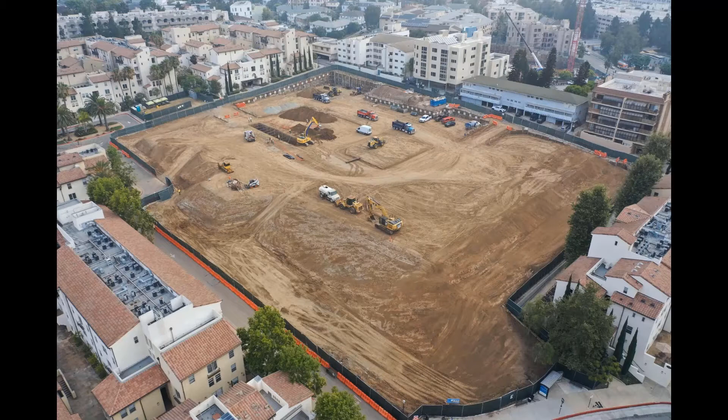The activities that we start with on a new ground-up structure are what we call earthwork and shoring. In these first clips, you will see the earthwork and grading activities. You can see large equipment, including front-end loaders and excavators. The equipment is used to move dirt around, excavate, and compact the existing soils to the elevations that

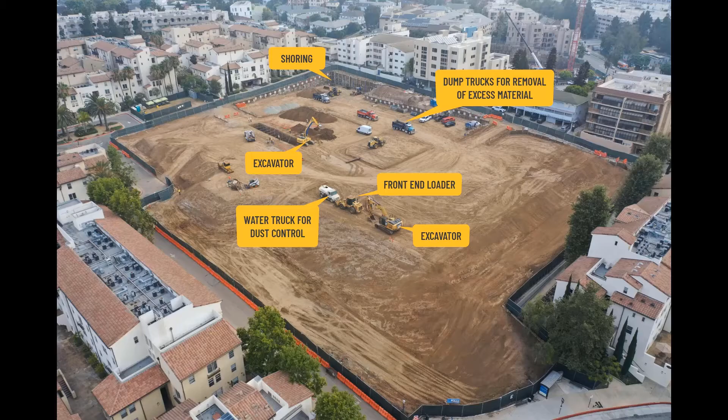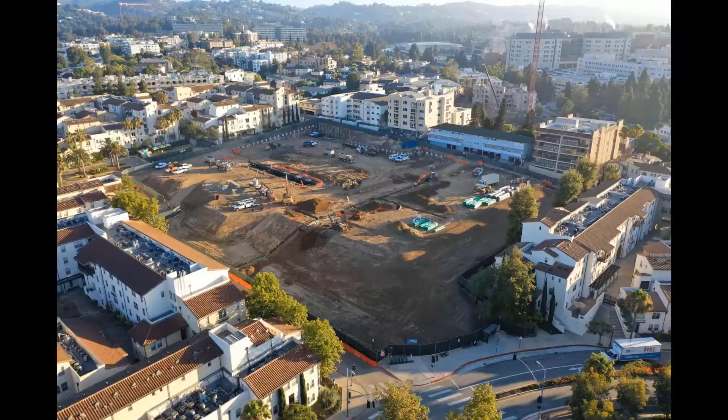the drawings call for prior to beginning the building foundations. Once we have the site to the elevations needed, we begin installing deep utilities. Here you can see green pipe laying on the ground that is for future sewer and storm drain lines. The deep utilities are put in early, prior to foundations being started.

Here you will see what looks like a darker gray flat surface that is put through the middle of the site. This is crushed rock material that we place to make it easier to move large equipment through the site without digging up dirt. This also helps keep the site clean and less muddy when it rains.

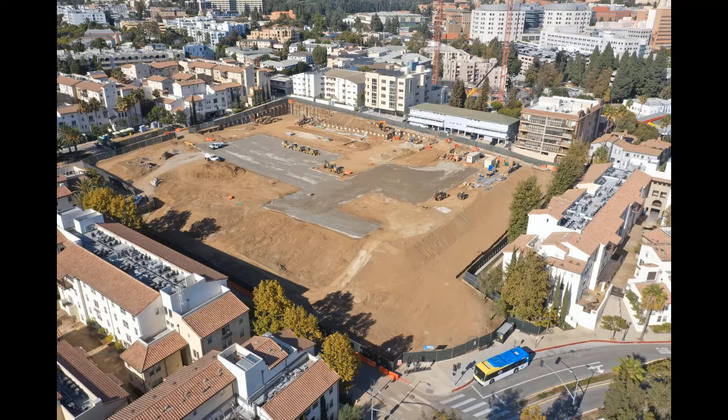In these next phases, you will start to see more material being stored around the site as we begin to enter into the structure phase of the project. Here we are beginning foundations, followed by concrete walls and concrete columns, or what we call vertical work.

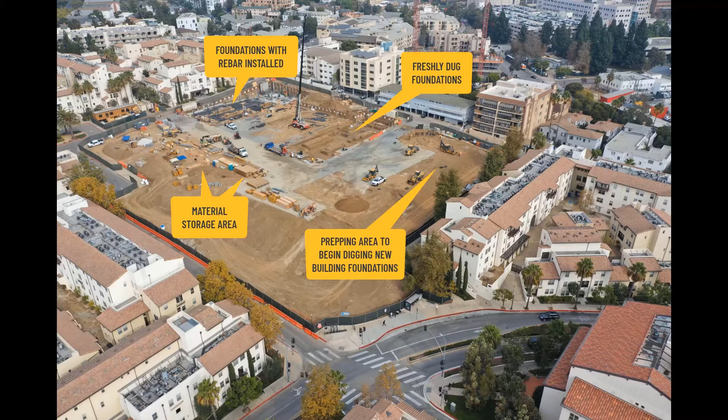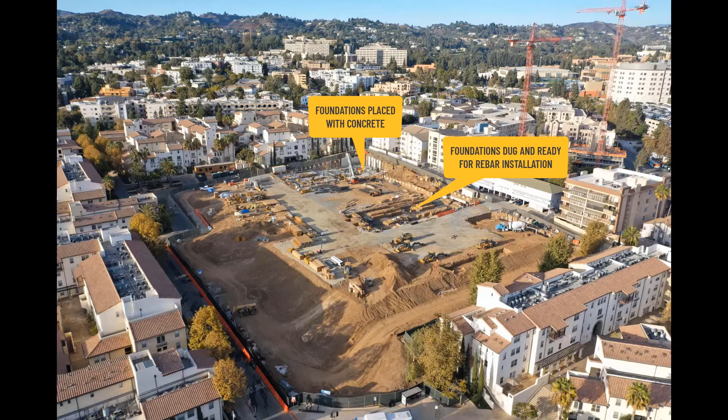Foundations are dug with a backhoe, reinforcing steel is placed inside, and then are filled with concrete. These foundations are what support the weight of the buildings we are building above, and thus distributed down through the walls and columns. Digging foundations with a backhoe requires a high level of skill and detail that can be seen in the middle of the project site.

You'll start to see more crane activity on site now, first with mobile cranes that are able to move around the project site. These cranes are used to place rebar and to set concrete formwork. Formwork is what makes the shape of our walls and columns, and is what the concrete is placed inside of.

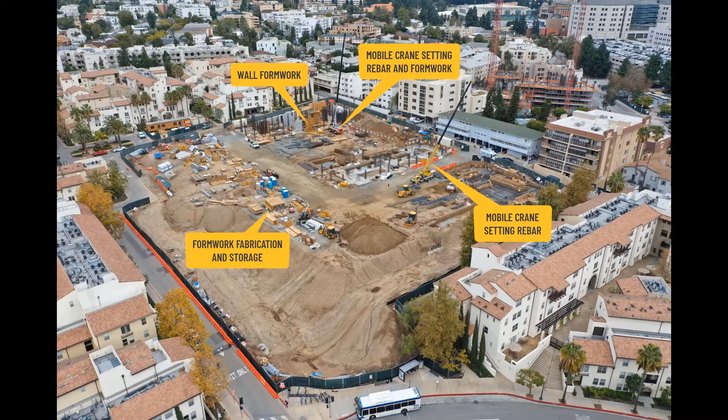Once the concrete cures or dries, the formwork can be removed and reused in most cases. This is what we call cycling our formwork.

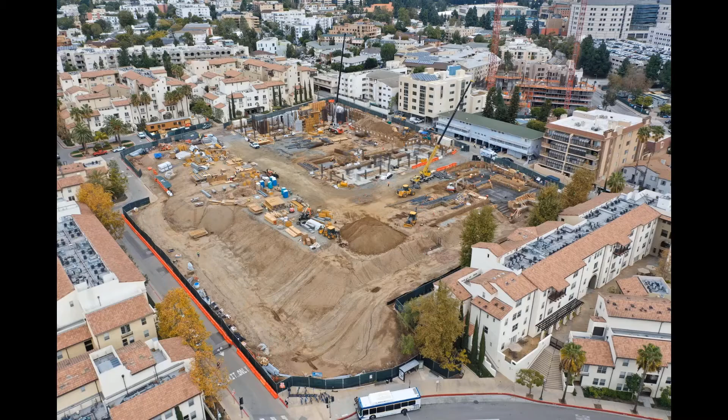As the project progresses and installs foundations, we begin to get ready for our tower cranes. The project installed multiple tower cranes that each have to be thoughtfully planned out to location, the reachable radius, and the capacity needed that they can lift.

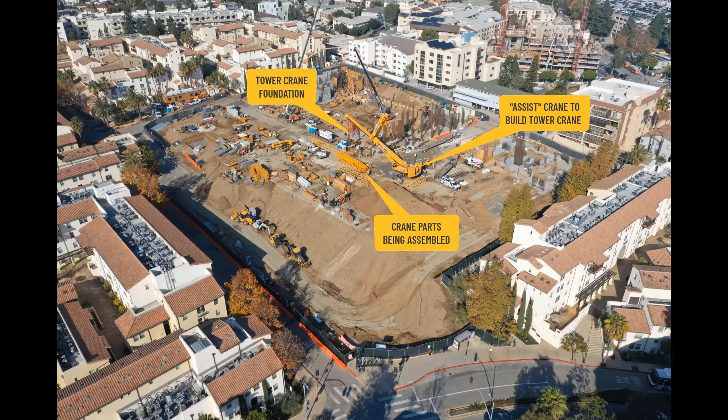Each crane requires a foundation to be set and its own crane to be built with. This is what the large yellow crane you see in the middle of the site is.

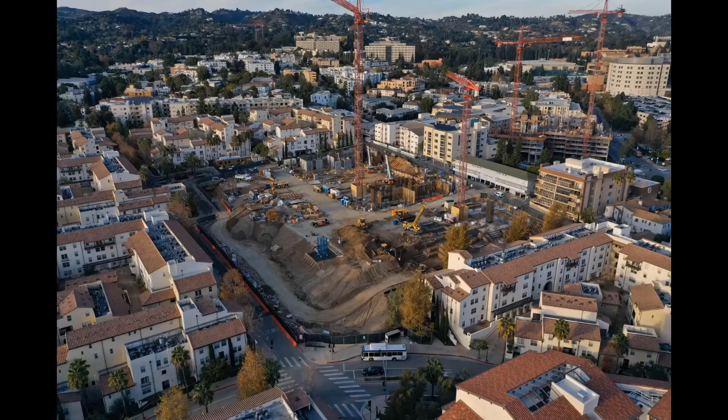The foundation stage is often one of the more difficult parts of the project for many reasons. First, space starts to become much more limited. It is the beginning of the project, and crews are just getting to know each other and to work with

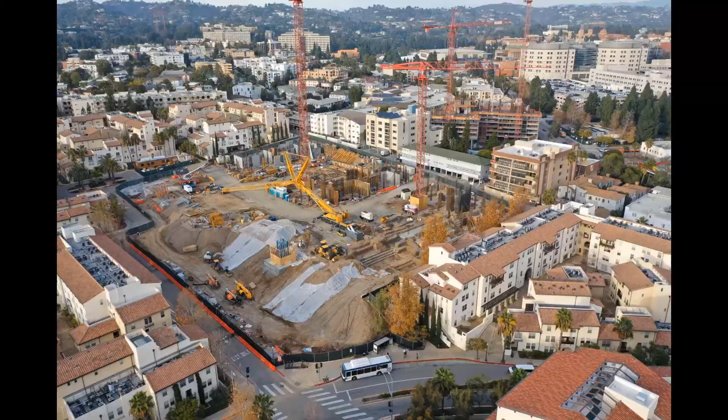each other. Work is often different throughout and requires a good understanding of details and drawings. Foundation work requires moving and hauling around a lot of dirt, which requires a high level of planning for where it will go so that it's not in the way of other parts of the project.

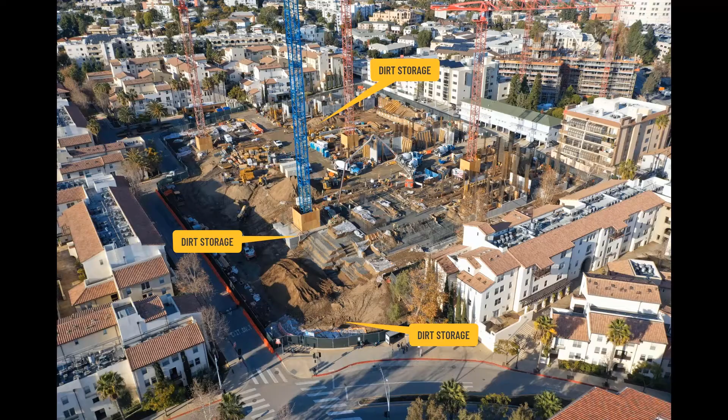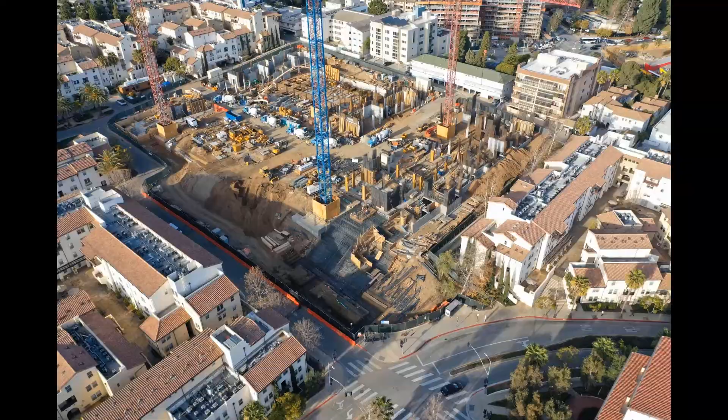If work is done in the winter, rain can have a large impact due to water and mud. If work is happening in a colder climate, you're also dealing with harsh winter conditions, including snow.

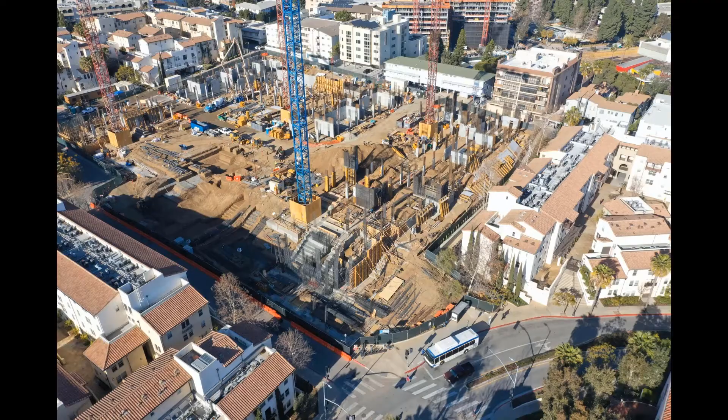As more cranes are installed, the project has the ability to move things around more quickly, and more walls and columns begin to take shape. The project then begins to move into the elevated deck stage. You will see in these sequences, each building begins to get taller and taller.

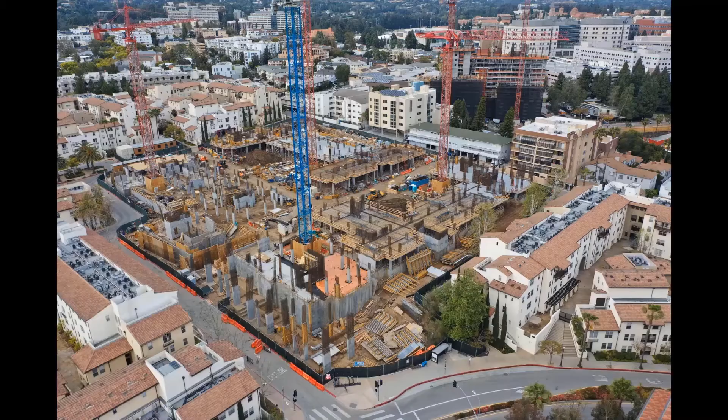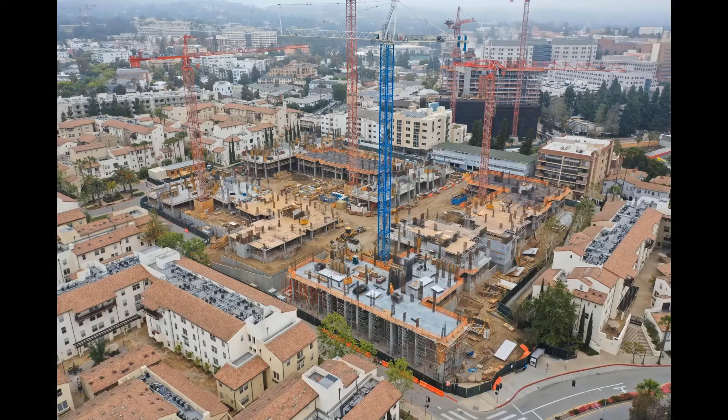The decks are built with vertical shoring posts that support plywood. Rebar is placed on top of the plywood to reinforce the concrete. Once all rebar is placed, we then place concrete on top of the plywood and shoring. This is what creates the concrete deck.

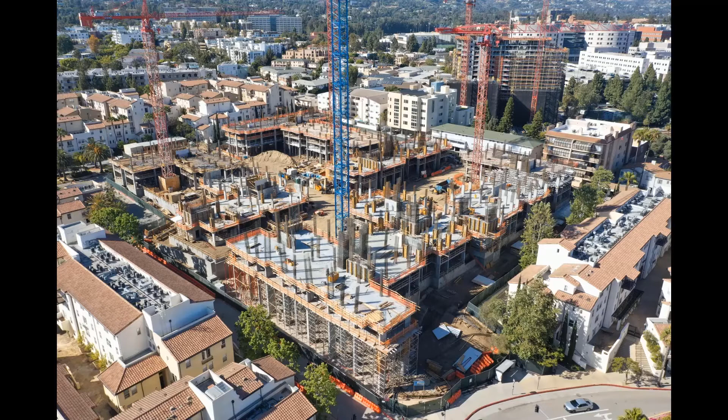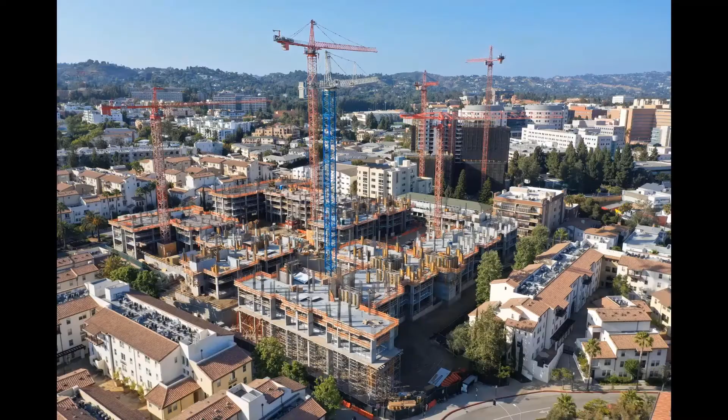Each deck is required to cure or set for 14 days. Then the plywood and shoring can be removed and cycled above to make the next deck. It took the project about 1 year to get from the foundation stage to the roof, which was 10 floors.

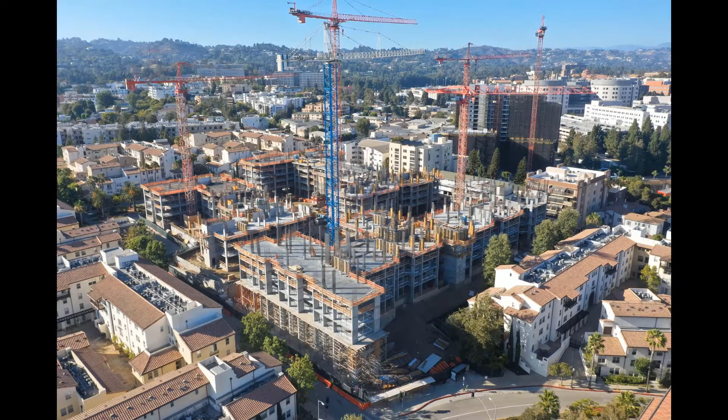As the buildings come close to topping out with concrete, you can see some other work start to take place. Scaffold begins to go up around the exteriors to begin installing the exterior systems that will eventually be a plaster finish.

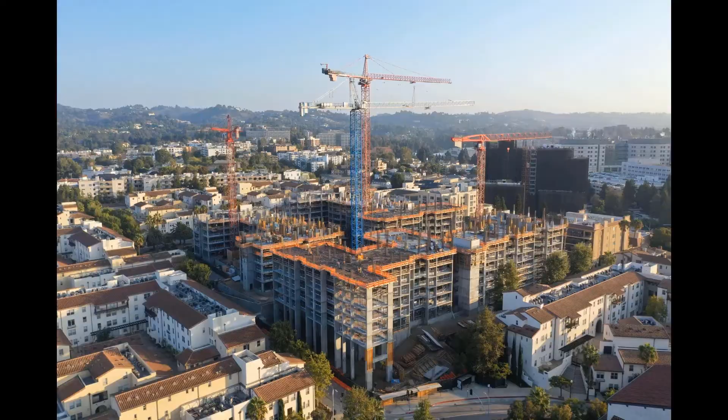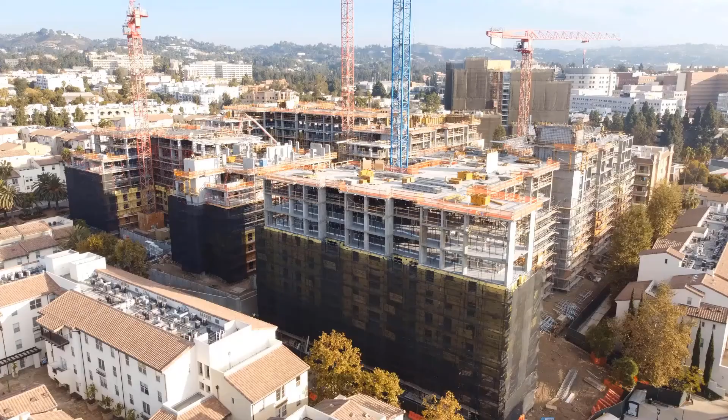On the inside of the buildings, something you can't necessarily see here, we have interior framing, electrical, plumbing, and mechanical systems beginning to take shape. Today, we are just about 50% complete and are transitioning to getting the building's roofs in place and the exteriors completed to a stage of what we call being dried in. We will be complete with construction in September of 2022.

Thanks, Mark. As Mark mentioned previously, at UCLA Southwest the primary scope of work for the last year and a half has been cast in place concrete. These structures are from the ground up about 10 stories tall each, and the material that builds them up is concrete. Just as with the questions about bringing trucks and deliveries into the job site, our concrete comes in trucks too, and all the material that goes into these pours comes on trucks. Coordinating all this material onto the job site prior to the pour, and then scheduling the trucks for the pour, is everything that goes into a successful concrete pour. This video gives you a day in the life of what it's like to live on the Southwest Campus Apartments job site.

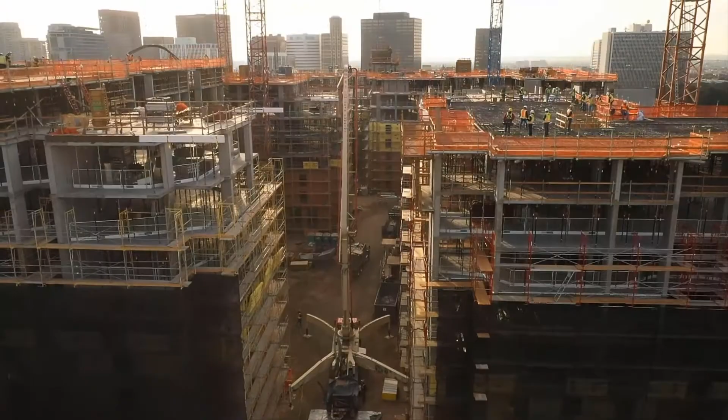Let's jump on site to a day in the life of a concrete deck pour at UCLA Southwest. Job sites are clearly pretty busy places, so there's a lot of different things that need to be coordinated in order to make a concrete pour successful. All the people you see here will help plan the things we're just about to talk about.

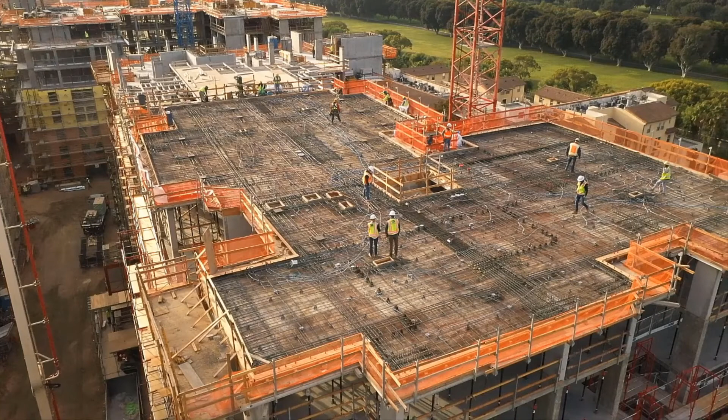Multiple team members are involved in any successful concrete pour. On this job, prior to placing any concrete, PCL management uses checklists developed in-house to verify that all the steps have been taken to ensure a safe and accurate pour takes place. Everything you see below gets installed and reviewed by PCL management, but it is continuously inspected and eventually signed off by a certified inspector from the university.

Just like baking a cake, there are a lot of different ingredients that go into a concrete pour. We're not just one big building full of gray stuff - there are a lot of different parts and pieces to this building, what we may call the life of the building. Let's point out a few items. In the concrete pour we have reinforcing steel, shortened to rebar, on the job site. This is what you could think of as the bones of any concrete slab, sidewalk, or wall - anything you might see in a concrete building - and it gives the concrete strength and holds it together after the concrete's hardened.

Some other ingredients are the things that give the building life - maybe that's water, maybe that's power - whatever you might think, we have to consider that as we pour this concrete. Some items we'd like to point out are different mechanical or electrical pieces of equipment. You see some squares in the deck - these are what we call blockouts. We'll have different pieces of mechanical equipment or vents running up through these decks so that as the equipment is brought into the building, we can successfully provide air conditioning, heating, and ventilation to the entire structure.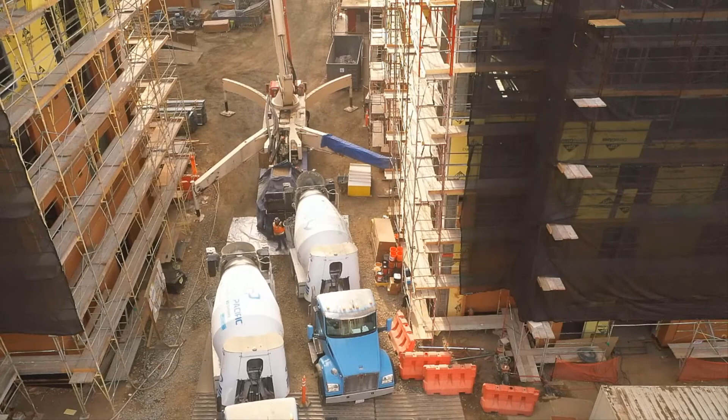Vehicle routes for concrete trucks are coordinated with the job site team to guide the trucks in and out of the job site in a timely manner. In order to keep the workers productive and the pour going well, we have trucks lined up outside the job site to always keep somebody busy.

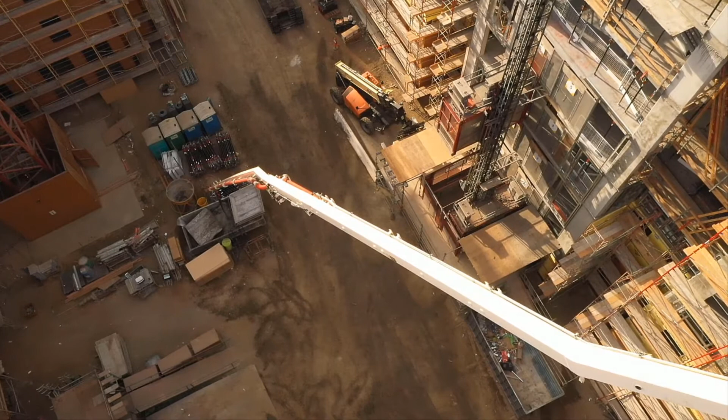That spider-looking structure you might have caught in the last frame is called a concrete pump. This large piece of equipment transports the concrete from the trucks up to the deck. Initially, we clean out the pump, what's commonly called priming the pump on the job site, to ensure all the previous residue is cleaned out before we get the pour going.

Once all the coordination and prep work is complete, the real action happens. The lead concrete laborer will take hold of the concrete pump and maneuver the hose around the pour, guiding the concrete out of the pump to ensure it's placed evenly across the slab. Our friend in the yellow hat is carrying what's called a vibrator. This piece of equipment is dropped in and out of the concrete slab as it's poured, to ensure the concrete cures and bonds correctly.

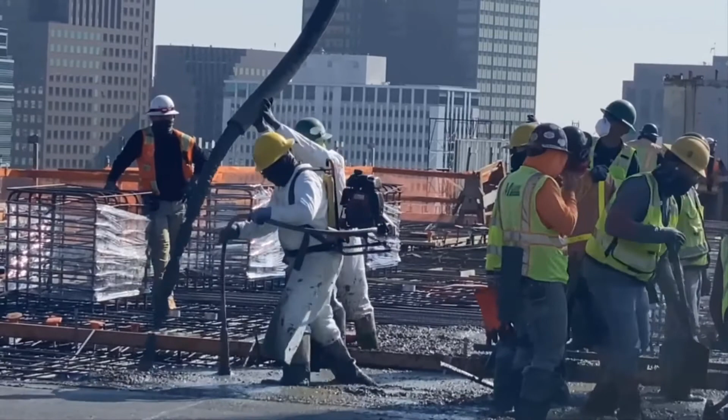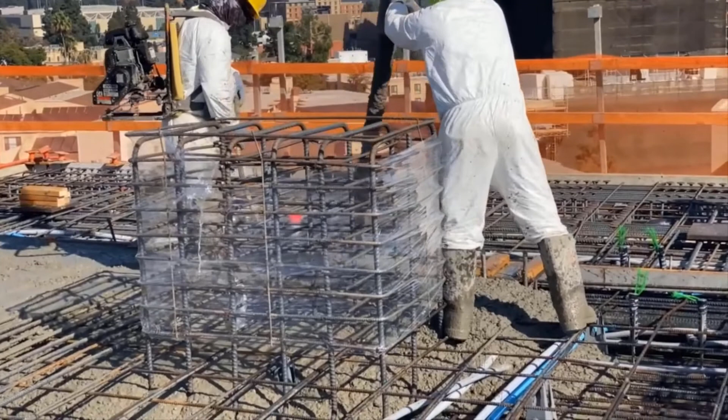There he goes, following right behind the pump man. The guy in the corner is watering the deck, kind of like you'd water your front lawn, but this is a key step in order to have the concrete retain moisture as it's being poured and ensure it doesn't dry quicker than it's being poured in the field.

On this particular day on the job site, the crew poured around 220 yards of concrete in just about 4 hours.

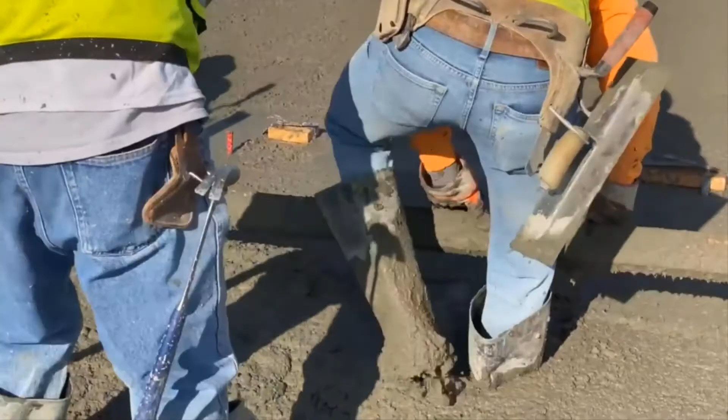Once enough concrete is poured, the finishers come into play. Just as their name implies, the finishers wrap up the pour by smoothing the concrete as it's poured into place. There are a few different tools finishers use, starting with screeds and shovels. Essentially, the finishers are evening out the thickness of the concrete as it's been poured in place, ensuring our friend with the hose didn't pour too much or too little in one specific area on the deck.

It's important to communicate to the finishers how the deck is to be finished, to what thickness, what level of finish. There are a lot of different elements that come into play once the deck is poured, and the whole crew needs to be aware of what's in the slab to ensure everything can be used after the fact.

Eventually, a vibratory screed is used on this slab. You can see the crew member using this piece of equipment on a larger surface area—it helps him more rapidly smooth out the concrete as it's poured. However, keep in mind that once we get to this point, the concrete pour is not over.

Finishers will eventually request to bring in what are called power trowels. These are walking machines with a spinning mechanism on the bottom that essentially finishes the slab in circles, giving it the final finish required by the architect, the engineer, or any designer who wants to see what the building will look like after the fact.

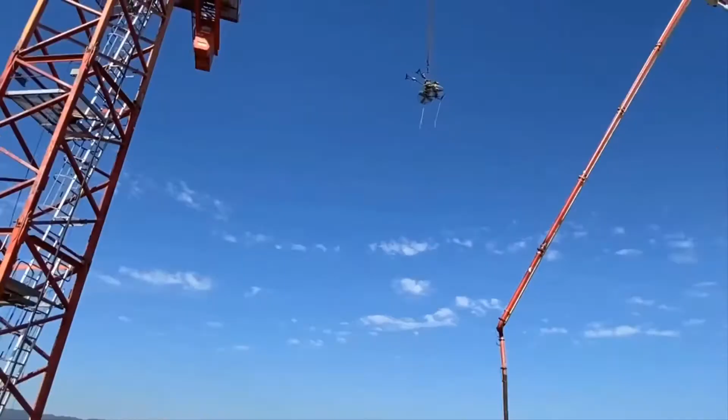As I mentioned, it's important that finishing is to the expectation needed for any future materials to connect to the concrete, or if it's bare concrete, that it looks presentable to the end user. In this case, that would be the management and maintenance staff at UCLA.

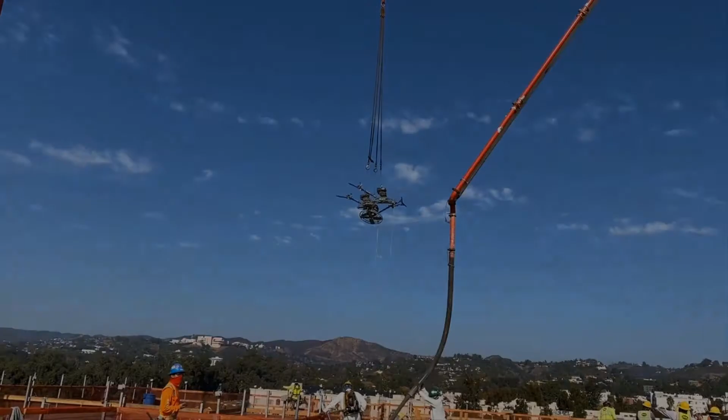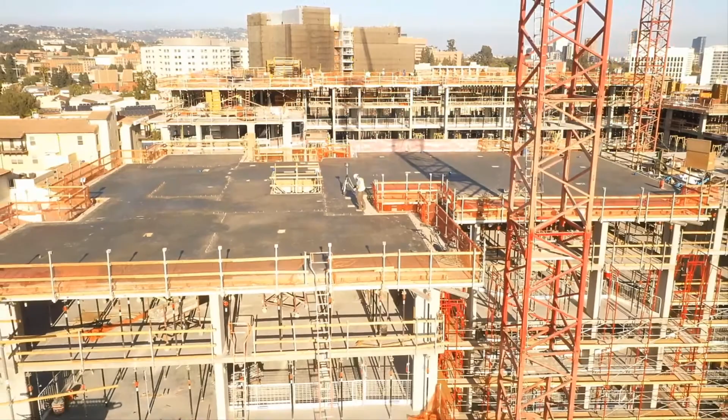At the end of the day, we have a complete concrete deck, but the work isn't done for any PCLer. What we do at this point is utilize new technology called laser scanning to get a full view picture after the deck has been poured. Laser scanning has been a huge resource at UCLA Southwest in particular. It essentially creates photo images for the team to analyze the deck as it's been placed in the field, and see how close it has reached the design intention. The different thicknesses and finish levels can all be reviewed by the team in order to solve problems, just like 3D modeling helps.

For other dismantles, I'll tell you about them real quick. With the assist crane not being high enough, you have to use what we call a tower bracket. They're installed on the side of the tower, and then each piece of the tower is removed as the rest of the tower is being supported by the bracket and lowered piece by piece. It takes a little longer, but it's sometimes your only option when you have no room or it's too high. So again, here you're going to see a top-down dismantle with an assist crane.

On this crane dismantle, we are working on a top-down dismantle. Other dismantles are when you install a bracket on the side of the crane and remove each tower piece individually, which you'll see later in the film.

The day prior is a setup day. We set up, clear the area, tour the site, and ensure the team is safe and ready. The setup of the assist crane can take 1 to 2 days for a hydraulic crane, which you see here in the video, and other types of cranes can take up to a week, like a conventional.

On this day, we also remove some of the accessories of the crane: the cameras, utility power to the crane cab, lights on the boom, jib, or the tower. The removal of the hoist cable is done on the previous day, along with the cable hook.

The first step in removing the tower crane is the counterweights—removal of the counterweights that sit on the counter jib in a vertical position behind the crane. These weights allow the crane to be balanced when lifting large objects. The second step is removal of the boom and the jib. There are 4 to 5 pieces of the boom, and each piece is disconnected one at a time by removing pins and lifting them down to the ground.

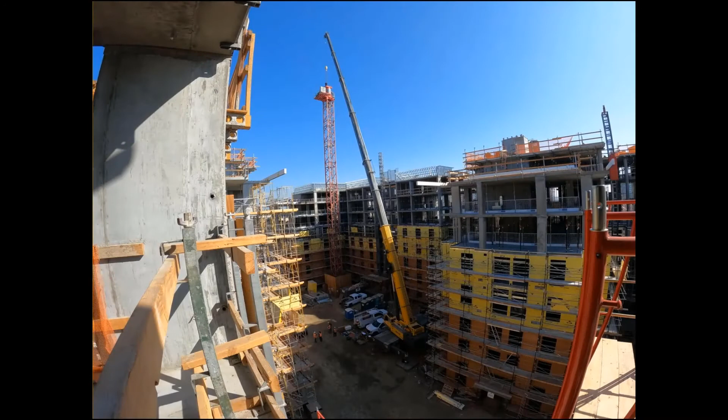Step 4, the cab and the turntable. The removal of the pins holding the cab, then we lift the cab vertically off the turntable. Then removal of the back of the cab motor house and the rear platform that the operator uses to inspect the cable, the rear, and the motors.

Once that is removed, the last piece of the cab assembly, called the turntable, that rotates the crane 360 degrees, is removed from the top of the tower.

Step 5, the tower removal. Each tower piece is removed in a section of 3 towers. So on our crane, we have 3 pieces to remove, which is 9 sections of tower. A zoom boom or Gradall is used on the ground to help set these pieces down safely, one at a time. As they're set on the ground, they are dismantled, loaded on trucks, and removed off-site.

Once all these pieces are removed, the assist crane can then be dismantled. This again takes 1 day for a hydraulic and up to a week for a conventional.

All right, great. Thanks, Christoph. So it looks like we've got some more questions flying in. There's one about Jesus, but I'll let him answer that one when he introduces the next video. Yep. Do you want to take the next one? Sure. So the next question was, how long did it take for you to get to the position you are presently?

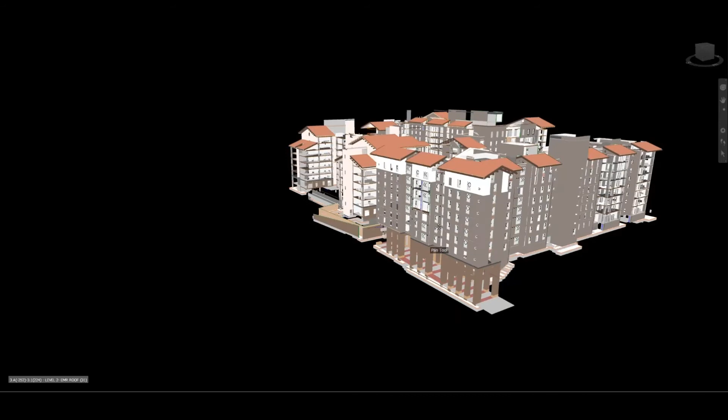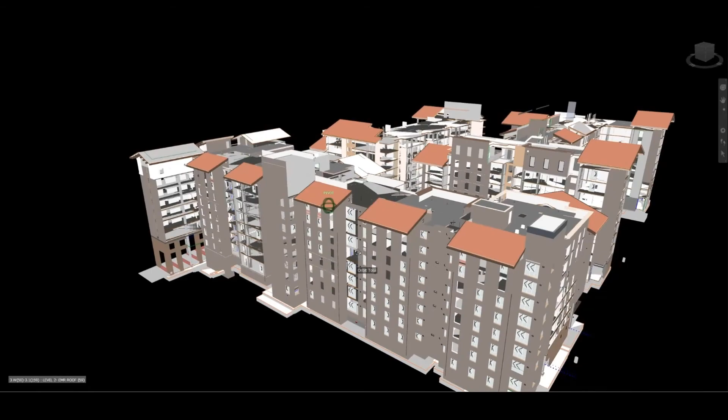The construction industry is traditionally based in a 2D sense - pen to paper, where we look at things in blueprints and then go out into the field to build them. However, the industry has transitioned into a 3D world. We now use computer modeling to build the building on a computer screen, look at all the parts and pieces, and make sure everything fits together before we enter the construction site and build it at real-life scale.

When things get really large in the construction field, it gets difficult to solve problems on the job site on the fly. Computer modeling helps us look at the parts and pieces, analyze if something will become an issue, and solve the problem before it becomes one.

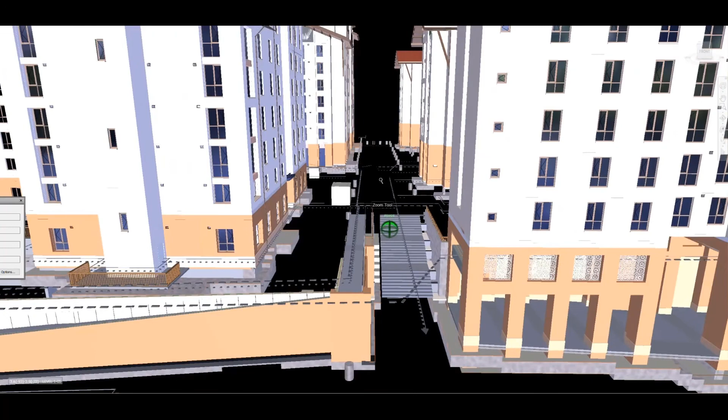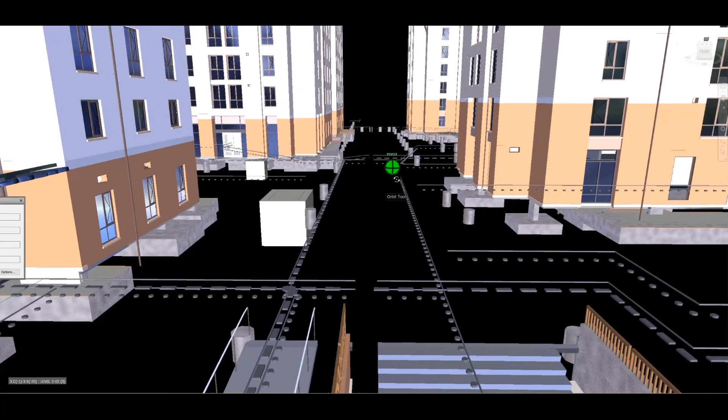Here you can see the foundations. The foundation is the first thing of the project, what starts everything out, and you go up through your structure. Specifically, our project was concrete, so it went all the way to the top of the building, pour by pour, and then came the drywall.

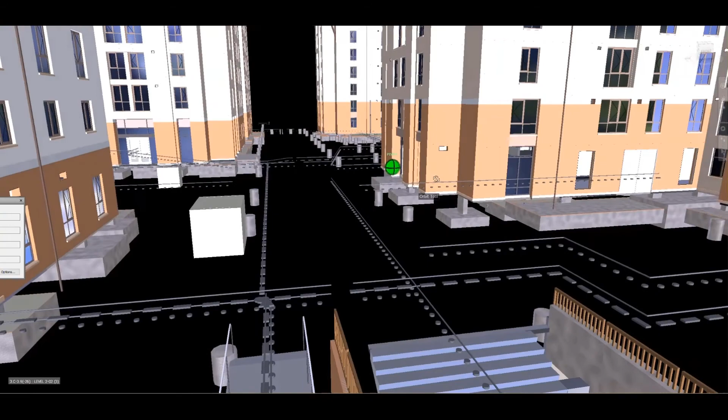At the same time, coming inside the building, you have all your mechanical, your plumbing, and as you close down the walls and everything on the exterior, as you see here, you have your windows and other aspects. So what the model really does is help our field team understand how the project is built, and it's very beneficial in that way.

Here you see a nice little walkway that would lead you straight into the busway, so students can gain access to public transportation very easily, as well as a nice view of this arcade area for one of the buildings.

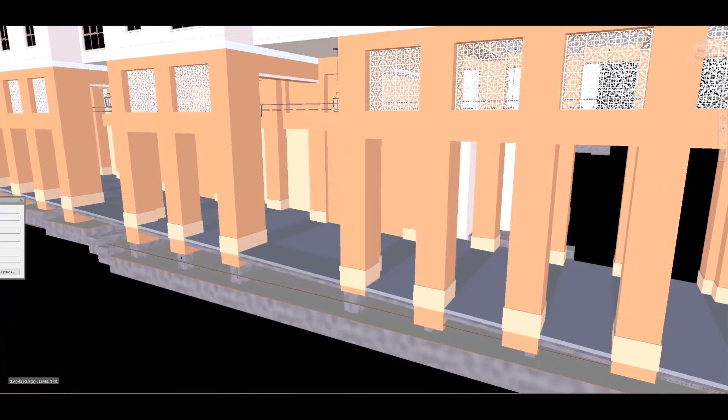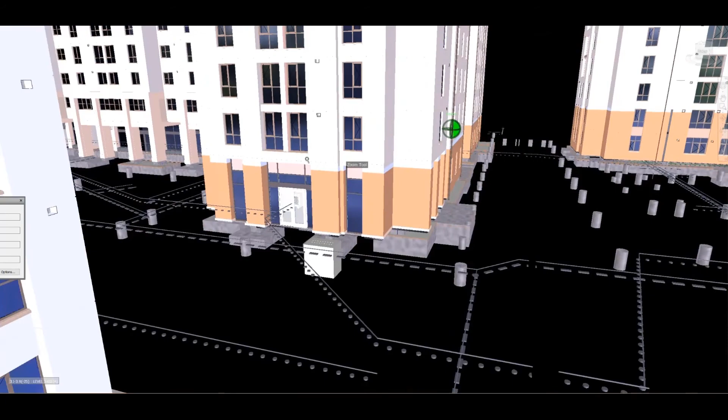Moving back into the site, you really see how the buildings are going to look as you walk through the courtyard area of the project. And then you really see the nice doors and windows as you go into one of the primary buildings of the project.

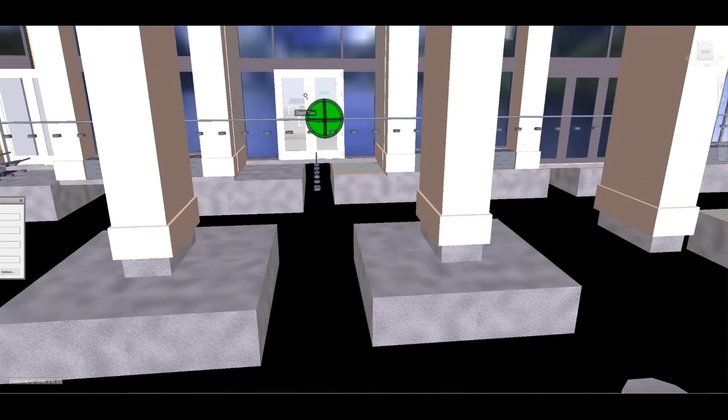So again, the model itself is a tool that we use out in the field so we all know how everything's supposed to be built, and we can put a 3D view into the 2D plans that we worked out of.

Here's a view of the interior side of one of the buildings and how it's going to look. There's a nice little area for the students.

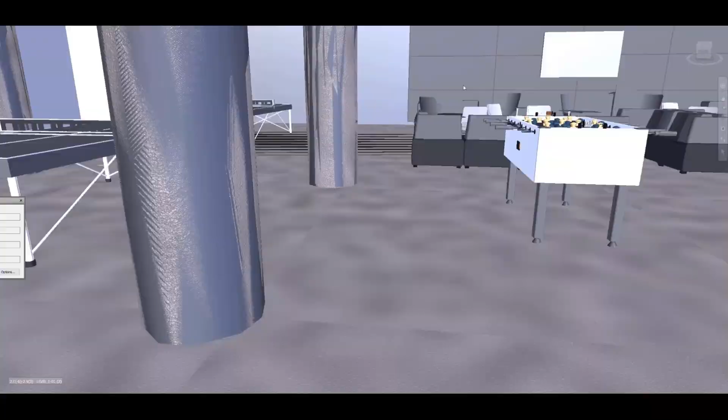So the next part of our technology that we use at PCL and our project specifically is SiteScan. SiteScan is a program software that we use to get real-time information, real-time data from pictures taken from a drone 200, 300 feet above the ground. So what it does is we do a flight, couple of flights. It takes 200, 300 pictures, and then we input it into the software, and the software produces all this data that I'm about to share.

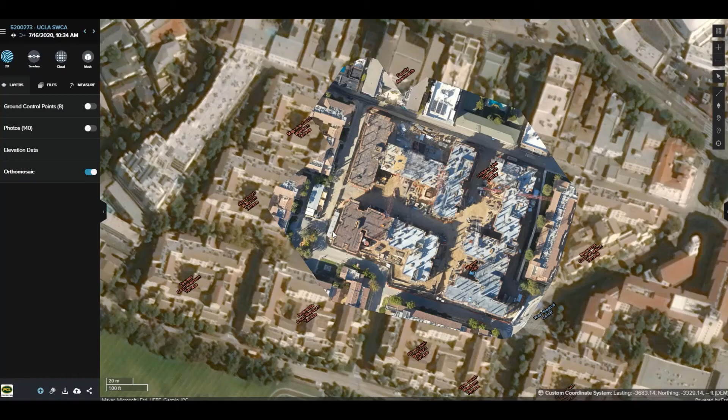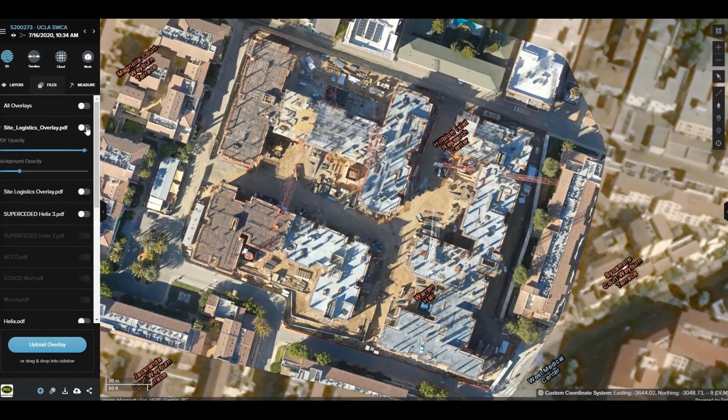One of these good examples of this data that we use is site logistics plans. A site logistics plan is basically a tool that we use on site to plan the work as we go through the weeks, the months, and we follow the schedule. Here you see how all the plan goes into effect.

You have all the buildings identified. You have where the cranes are going to be, as shown in the middle of the site with those crane icons. You have the laydown area. You have the route to enter and exit the site, being gate 1 and gate 2. And then you also have your muster points, which essentially are, if there's an emergency, that's where you're supposed to meet. You have where the fire extinguishers are, so the fire marshal and the emergency department knows where everything's at. So this is one of the most critical tools that we have on site.

And the awesome part about using SiteScan with this is that we can have a live photo of the site, and we overlay the logistics plan on top of it. So it's always changing as the project changes with the construction going on.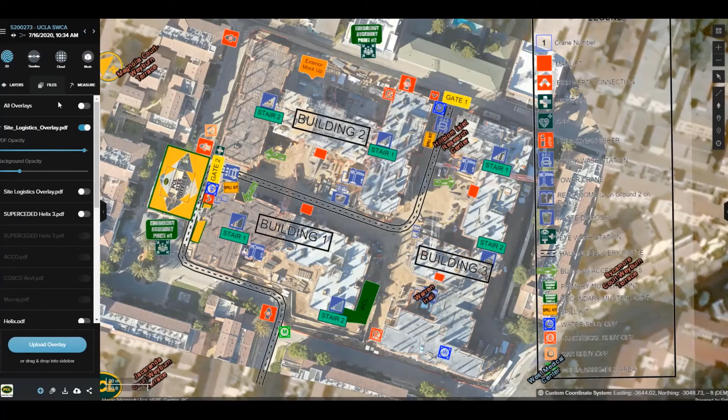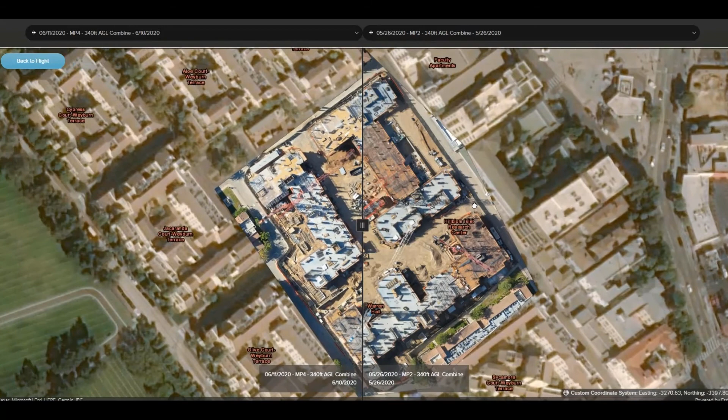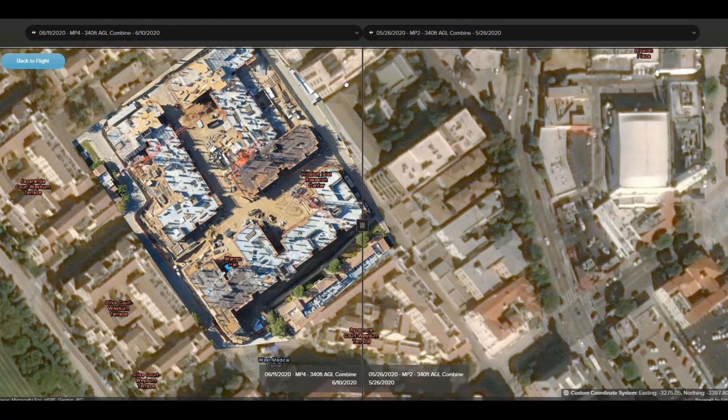Here we have a comparison between 2 different flights, 2 different days. This is a good tool that we use just to see how the project changes from one day to another. As you can see here, these photos are about 2 weeks apart, and there's a lot of change in between them. So it really helps to grasp and understand how fast the project moves.

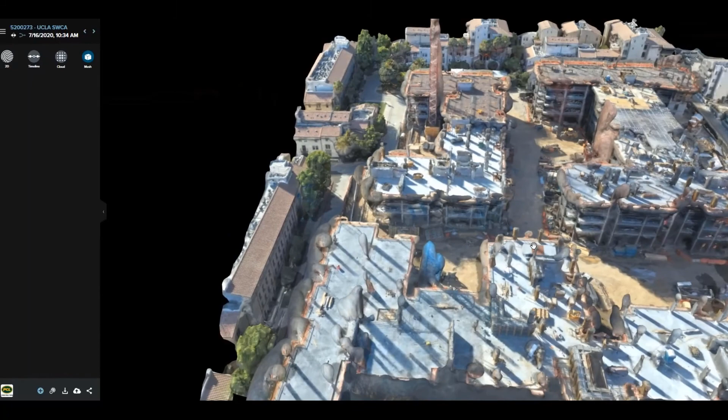The next part of the tools that we can do with SiteScan is just having a 3D model. So this, you can see, is a live or updated mesh 3D model of the site, how it looks after we fly the drone. So this is kind of the data that we can export from it. As the project continues, we can document the project and give a good understanding of the status of the project and share it with the team, the owner, and whoever needs to see the project progress.

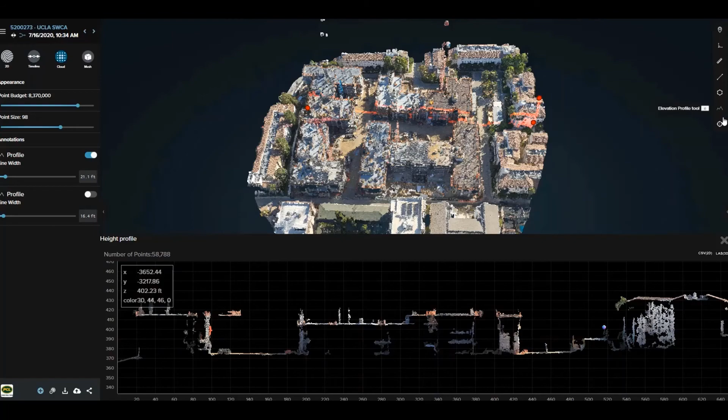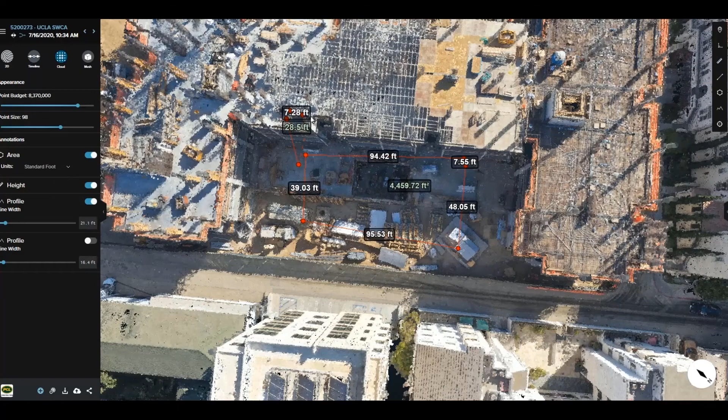The next thing on the list is the 3D mesh, which gives us a lot of live data, a lot of information that we can use for quality control, for checks in the computer that can be done in the field. For example, here you can see how I'm getting a square, which is giving me an area of the whole square that I created on the program. And then you can also get elevations, you can get distances, you can get point load, anything that you really need to do any quality checks.

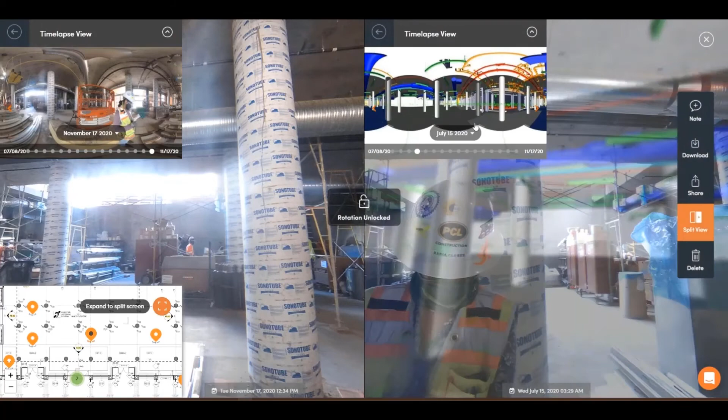The next technology we're excited to share is a program called StructionSite. StructionSite is a software that we use where we document a lot of the day-to-day photographs, which are getting updated 3 times a week by our field team.

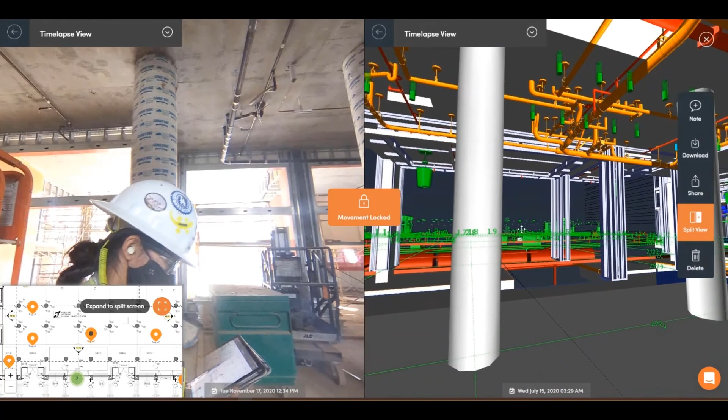As you can see here on the left, you have the actual as-built condition, or the way it looks in the field, versus what the model or what was planned. So as you can see, it's pretty accurate and pretty on point, the work in place versus what was planned.

Moving forward in the construction site, you can see here a plan view of the project. These are all predetermined locations where our team decided progress photos were going to be beneficial for the project.

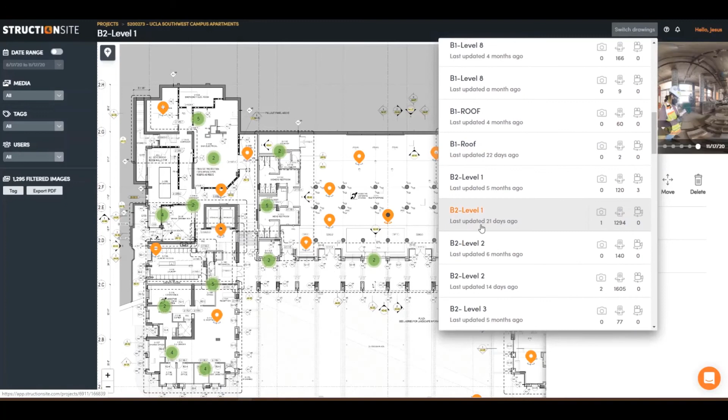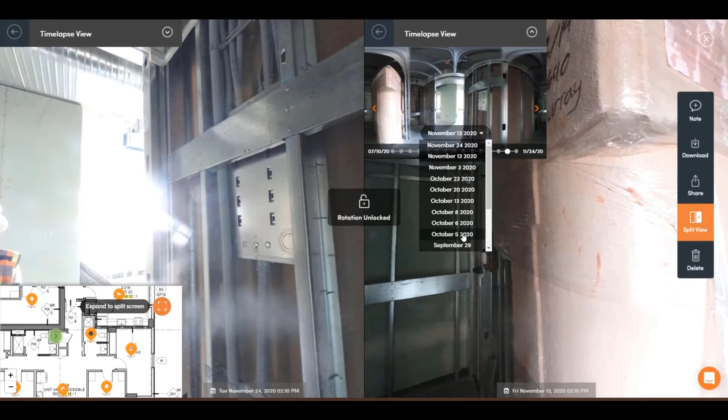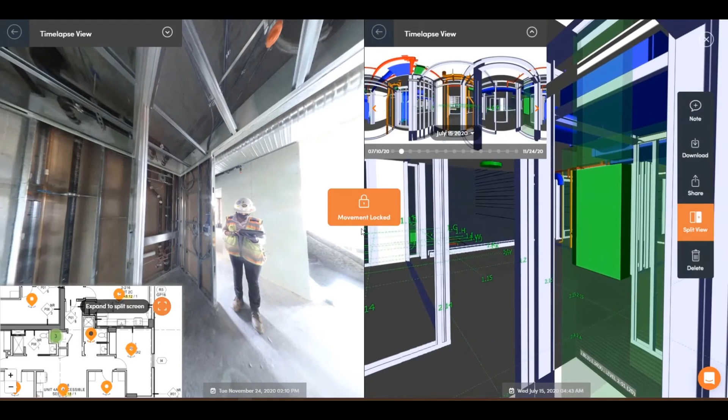I'm going to move into another level here and show you how we use it for closing down walls. So a wall is a metal stud that's sandwiched by two pieces of drywall. Once we close those walls down, it's very hard to know what's inside unless we tear down that wall. With StructionSite, what we can do is take pictures prior to closing those walls to capture every component inside of the walls. So at a later date, if we ever have to or are in question of anything that's inside the wall, we can come back to the program, look at the photos, and see exactly what was in there without having to tear down the wall and cost us a lot of money and headaches.